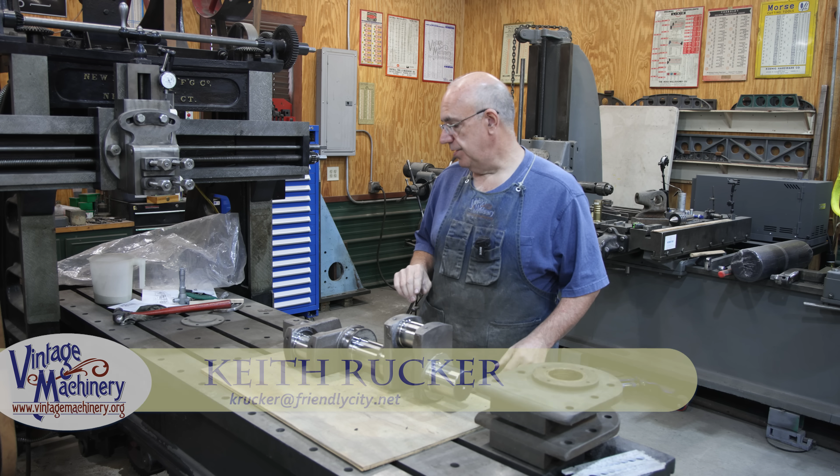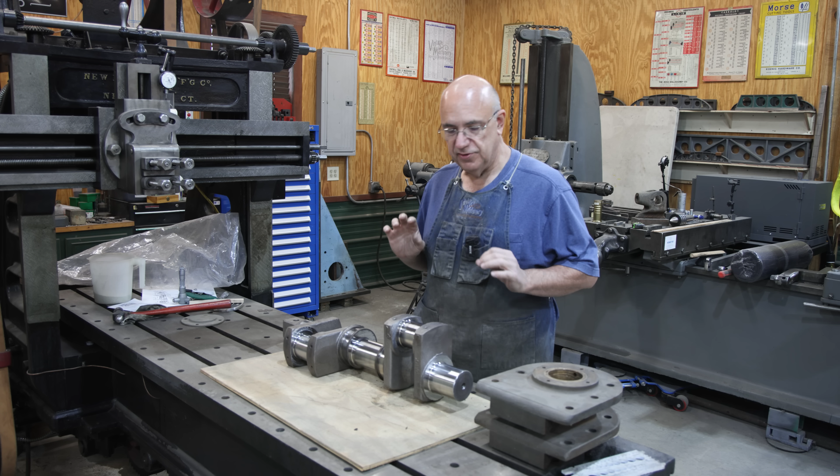Guys, today back to working over on the steam Stoker engine, and today's goal is to do some inspecting work, figuring out and coming up with a game plan going forward. I also need to get a bunch of parts and hardware ordered because I know I don't have a lot of the stuff I need. I need to get a list of what I need to order. So we're going to be doing some of the things that just have to be done in order to move forward on this project.

We've got the slideways for the crosshead machined and they're ready to go. Before I can really continue on, I've got to start looking at putting this thing back together, and there are some things I just haven't taken the time to look at. Part of it has to do with the crankshaft and these bearings right here. Now I have mentioned before that this crankshaft was honestly one of the things that kind of slowed me down on this project. When I got the Stoker engine taken apart originally, the crankshaft had some issues with these bearing journals in here.

We decided we were going to get this whole crankshaft reworked. I took it to a shop not far from me that specializes in doing crankshafts. That's really their expertise, mostly in the diesel engine world - big semi-trucks, big tractors, things like that. But it's a crankshaft, and when I took it in there he said, yeah, I can do it, doesn't matter if it's a steam engine or a diesel engine, it's a crankshaft. I had the original specs for this, I had the blueprints for it, and he was able to take that and basically take this thing back to where it needs to be.

What he had to do was build up all the journals in here, all the bearing journals, and then grind them back down to the proper size. He has a machine shop set up for that. I wish I could have gotten some video of him doing this, but he wasn't doing it the day I was over there. He's got a system where when he welds this thing up, it's a special machine - basically a MIG wire feed welder that welds it, kind of like when I'm building up journals to do cane mills, but it's all done underwater. He's got it all submerged down into a tank, which keeps the crankshaft cool and keeps it from any distortion.

All right, so here is the crankshaft. You've got the main journals, this one and this one, on the center of the crankshaft, and there's the two bronze end caps. There's also one in the center that this whole thing pivots on. You've got these journals out here, these are for the connecting rods, and they're offset at 90 degrees. And then you've also got these two right here, these are where the eccentrics go. They're kind of like cam lobes, and that's what's going to move the valve back and forth to let the steam into the right place inside the engine.

So we've got basically 3 different measurements that we need to make. Let me try to remember. The main journals, according to the blueprint, are supposed to be 3 inches. Let's see what we got here. I'm going to measure this with my micrometer. And yeah, we're right on the money. So these are all right on 3 inches.

These up here, I don't remember what these are. So 2 3/4 — 2 3/4, right on the money. And then I think these are actually larger, I need to go up a size of micrometer here. Yep, these are 4 inches right here, and they are right on the money. So I know where we need to go. Again, he did an outstanding job grinding this, these are dead nuts on right where they need to be. So we should be good to go there.

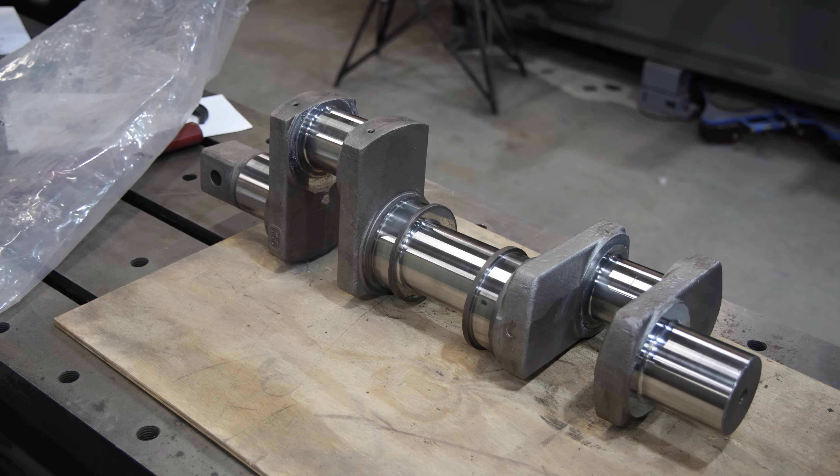All right, these pieces here basically bolt onto the side case of the main casting, and your main journals have one bearing on this side, one on this side, and a third bearing in the middle that's just a split. These right here are solid, not split, but I need to check these out, check the diameters and see where we are. Now one of them just has an end cap that goes on it, in fact this is the end cap right here, that'll seal it up, keep any oil from coming off of it. The other one actually has the shaft that comes through it, and there's a square kind of power takeoff on that they actually power it with.

This one has a grease seal or oil seal that presses in. I've already pressed that out, and I've been able to find this is a Garlock brand. I found the numbers on it and was able to order an exact copy. That is on its way to me, but there is a seal that presses in there, that's why that little indentation's in there.

So these should be, well for what we're going for, they need to be 3 inches, or actually just a little bit oversized, because the journals are a true 3 inches, and for clearance you need some oil clearance in there. They say for every inch you need between 3/4 and 1/1000 of an inch, so that's going to be about 2 1/4 to 3/1000 oversized, which is ideally where we're going. I don't know where these are, I have not measured them. I have a bore micrometer here, a tri-mic they call these, 3 points, you get a really good accurate measurement with it, and I'm just going to see where we are.

So when I took this engine apart, I kind of bagged up a lot of the parts and put them over here where I would have things together, and I tried to even mark on here where they came off of. A lot of this is hardware, and on this Stoker engine, they didn't really use bolts to put it together like you would think. Almost everywhere where there would be a bolt to hold something together, for example these little side plates over here that bolt onto the side,

instead of having a bolt that goes in there, they have a stud that comes out of the casting and then a nut that tightens up on it. That's pretty much how they did it all. Not exactly sure why, there's a reason for that, but that's what we're going to go back with. A lot of these places you probably could use bolts, but hey, we're going to keep it original, so we're going to put studs back in here.

Now I have here a parts list and a parts diagram that shows all the parts, and there's some information about the studs in here. Let me just zoom you in here and show you this drawing. This is pretty cool, so this is a nice drawing that shows a side view and top view and everything else, and it has a list over here of all the parts that go in here and where they go.

This diagram is going to be real helpful to me as I start putting this thing back together, I'm sure. Although I think I remember where most everything went, I may have a question or two, and I can take a look at this, and it will really help out in putting it back together. I also have some other documentation, drawings, and so forth. Fortunately, I got a lot of really good information on this engine that's going to really help out putting it back together.

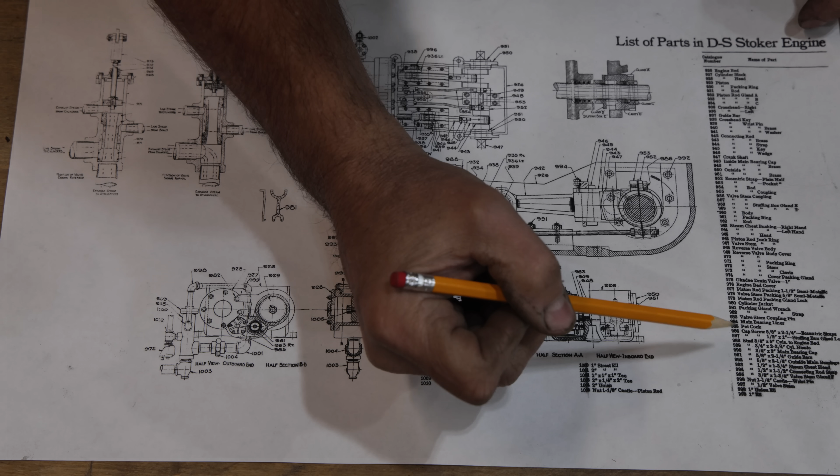But down here, you got all the different studs, and you can see, like right here, you got a stud that's holding that plate on here. You got studs holding on the side plates here. There's studs holding everything together in here. So anyway, I got to get all this stuff ordered. I got the original stuff that came out of here, but this stuff is toast. It was really badly pitted, so we're just going to replace it all and put fresh hardware in here.

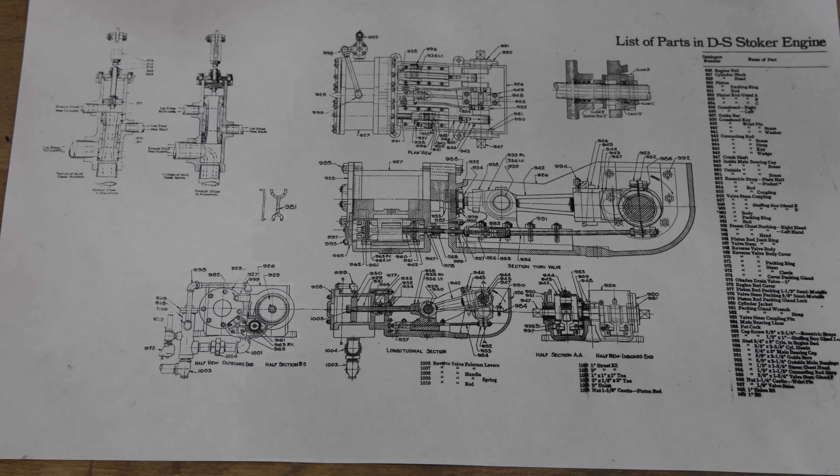I'm just going to grab my first bag here and dump this out.

And these are the studs that actually hold those side plates on with the bearings that we were just looking at a minute ago. And I got nuts.

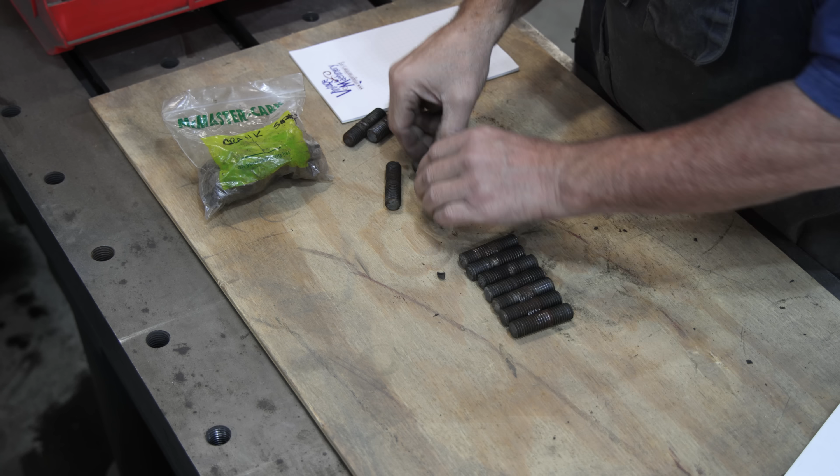All right, so there's the nuts. Let's figure out what size these are. So these are 5/8 inch diameter, and they look to be 2 1/4 inches long. I'm gonna look over here on my parts list. Yep, 5/8 by 2 1/4. I found that here on my parts list. I'm just gonna kind of put a check mark there.

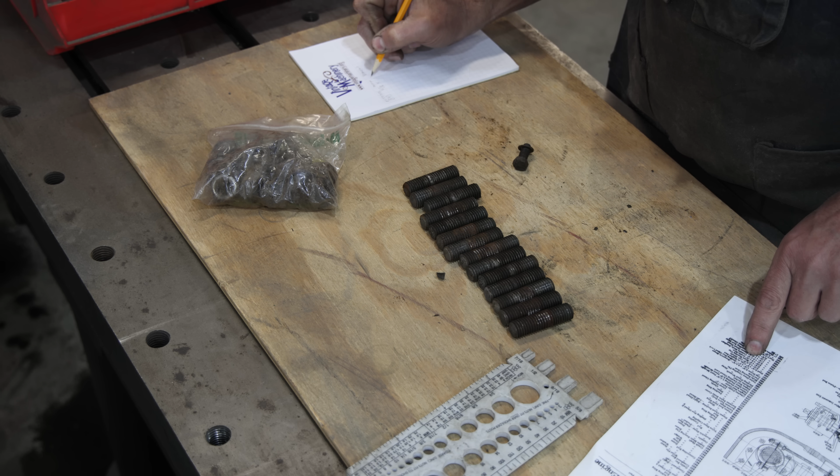We got 14 of these. I'm gonna write these down and go verify these numbers looking at the holes in the machine. This is the outside main bearing. I need 14, and we need 5/8 by 2 1/4 stud, and we'll need nuts for those too.

Now there's also, this is one place they did use a bolt, and this is the little cap that goes for that little cap we talked about on the end. These are 3/8 by 1 inch. There's 4 of those. I'm just gonna put bolt there.

Okay, let me put these up. We'll grab the next ones and see. These are not in great shape, a lot of the hardware itself is really severely pitted, and this actually isn't that bad, but I wouldn't want to reuse these nuts for sure. We're just gonna put all new studs. A lot of these studs I actually broke getting them out, or they just really fought me the whole way. We're putting all new hardware in here. This whole thing was, anything that was cast iron held up pretty good. Anything that was steel was severely pitted and rusted beyond what I'm comfortable trying to reuse.

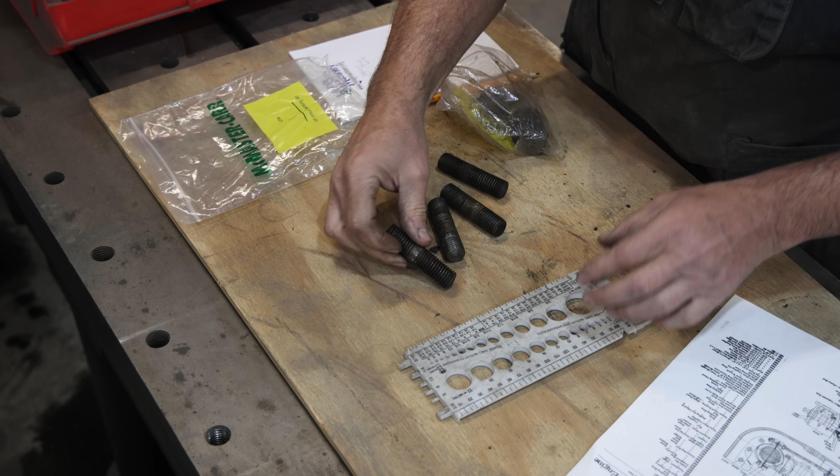All right, what do we got here? These are for the main bearing on the inside, and there's 4 of these, and these are 3/4 by 3. Three-quarter by 3 stud and nuts. Okay, next, all right, these are the cylinder studs.

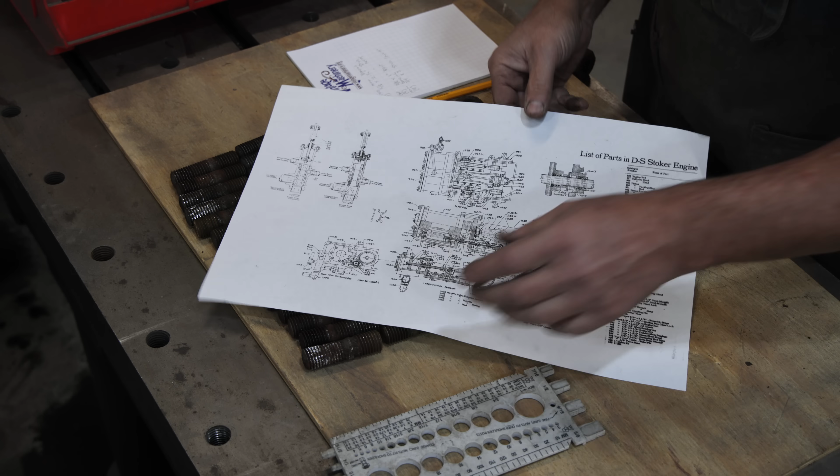So all around, the whole cylinder on this thing is kind of bolted onto the main case. And see, we got multiple things going on in this bag. Let me kind of get these sorted out. All right, so the cylinder studs, I will note that on my drawing, you got a short stud on this side and a long stud on this side. Now, this model is a little bit different than the one I've got. There's a bigger separation in the center section on the one I have, and it basically doesn't have a stud that goes all the way through. It's a short stud on both sides.

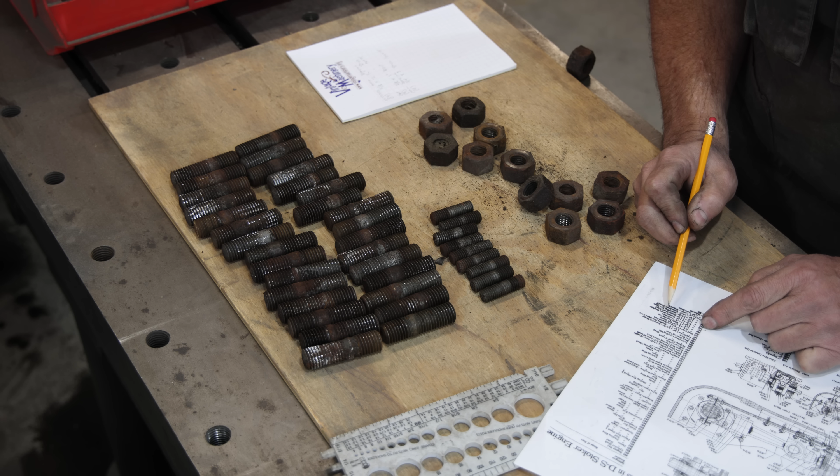So in this, let's see what we got, what it says we need. Let me find them on here. All right, so I got 3/4 by 5 and 3/4 by 2 3/4. So let's see what these are. These are 3/4 and 2 3/4. So we don't have the 5-inch ones, we just got the 2 3/4.

And let's see, these are, what are these called? The cylinder to engine bed. And these are 3/4 by 2 3/4. There's 31 of them. Interesting. I'm going to put that on here. I'm going to confirm all these numbers. I don't have a list over here that shows the numbers of them, how many.

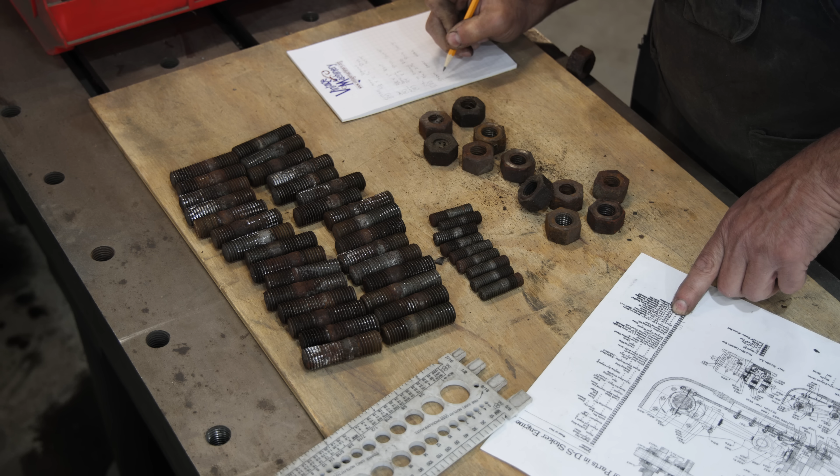Now there's also these. These are 1/2 inch by 1.75 inches. Okay, this is for the steam chest heads, and that's why they're in that same bag. So, 1/2 inch by 1 3/4, and there's 9 of them.

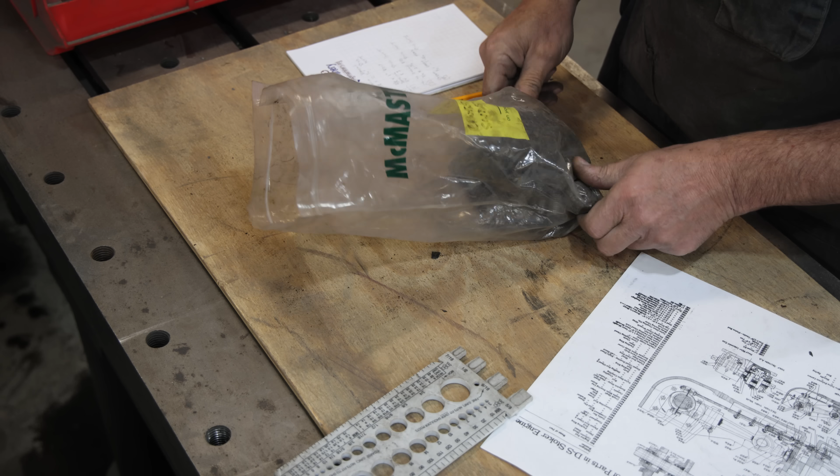All right, these are the crosshead studs. So that area that we just worked on inside the engine that we planed, these are the studs that hold the little cover on those. These were really in bad shape. Look at that nut there, how corroded and pitted. I mean, it's halfway gone. So let's find these on the list.

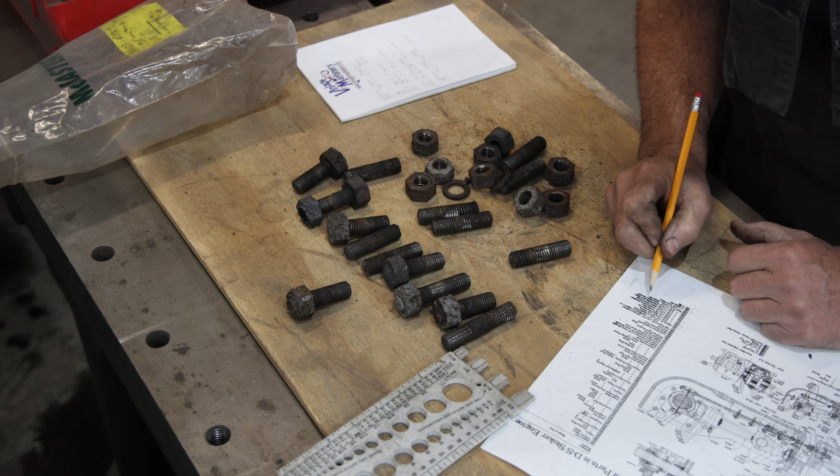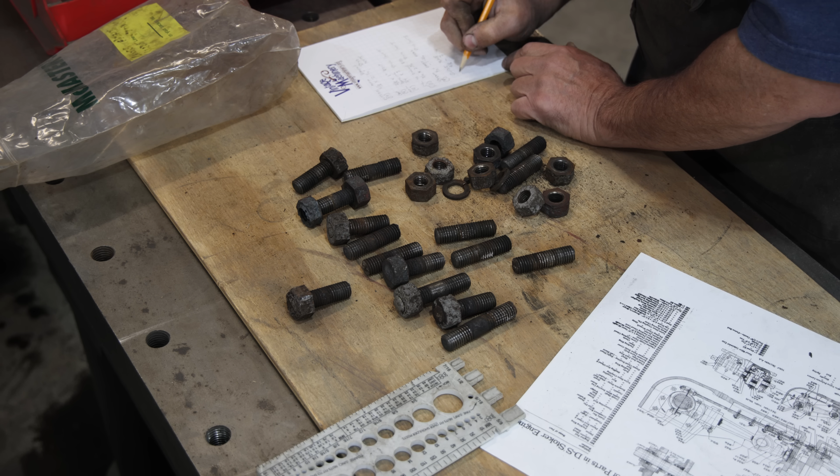I think these are what they call the guide bars, which they say is 5/8 by 2 1/4. Let's see if that's right. 5/8 by 2 1/4. Yep, call these guide bars. We got 16 of them. I'm going to confirm again all my numbers.

Okay, these are the top cover studs. There's a cover that goes on the top that holds them down. These are 1/2 inch by 1.5 inches. Let's see. Cover.

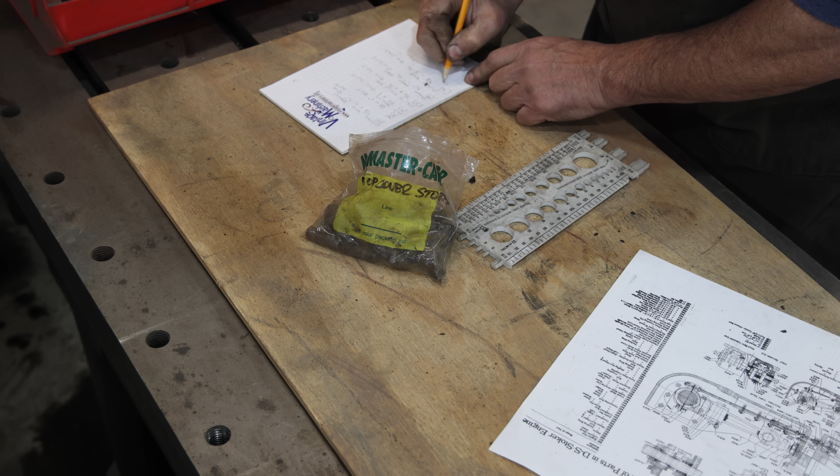All right, we are getting our list of stuff put together here. I think I've got my hardware pretty well covered between measuring what's over here and going down the list and seeing what all I need.

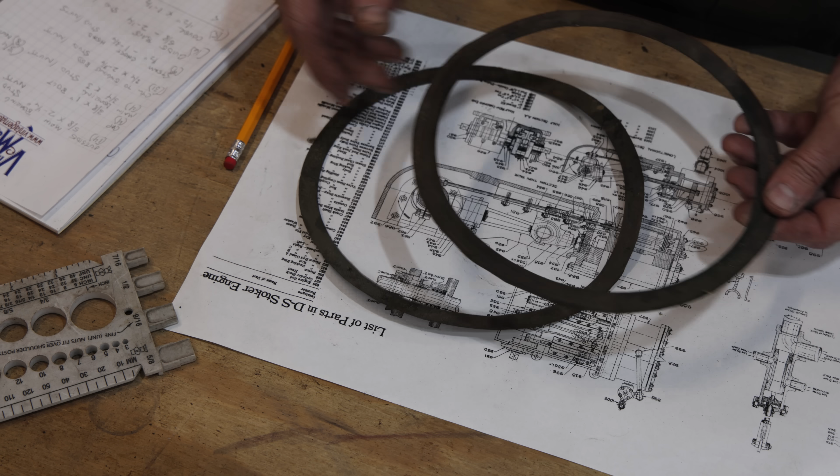The next thing I need are some copper gaskets. These actually go between the main cylinder casting, cylinder block, and the cylinder head. There's 4 of these, 2 for each cylinder, one for the front and one for the back.

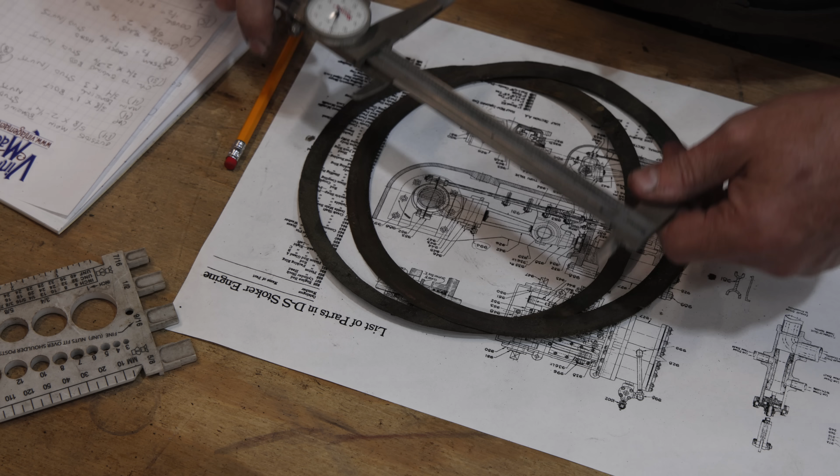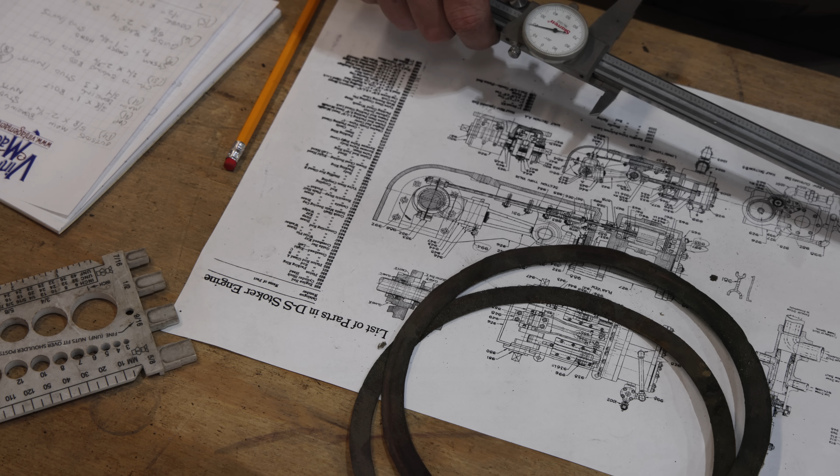I've got them measured out already on what I need. Let me see if I got that sketch. So these are, it's like 8 1/4 on the outside diameter. The inside diameter, 7.1. I actually measured, I think 175 is what I need, 7.175 inside diameter. I measured the part that they fit up over, and the thickness of these is about 25 thousandths.

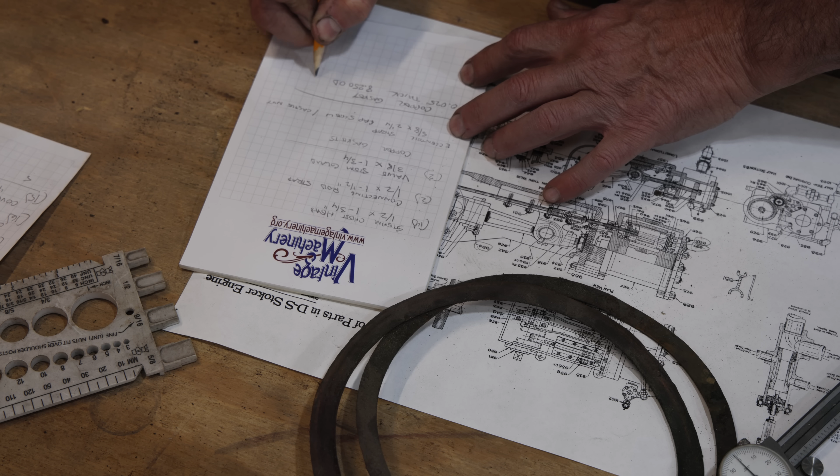So let me write this down. 25 thou thick, 8.250 OD, and 7.175 ID. I'm gonna have to probably order these, get somebody to cut them out for me. My laser won't cut through this metal, so I'll have to get them done somewhere professionally, but I'll find some place to get those ordered.

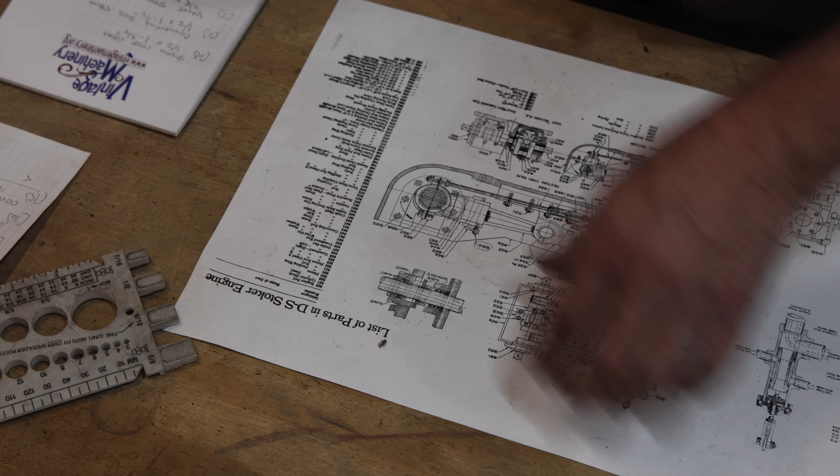And while I'm measuring gaskets, the other thing I need is some gasket paper to make some paper gaskets. There's a couple places that need these. I kind of saved some of the old ones, what was left of them. The main thing was just to get the thickness of the gasket paper.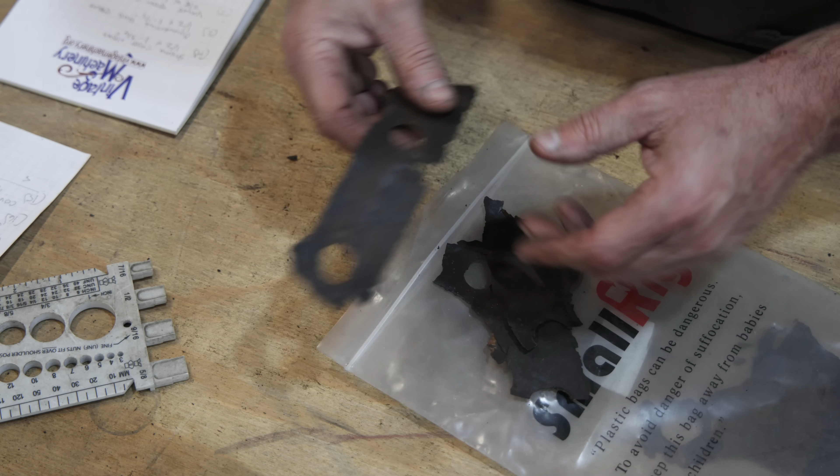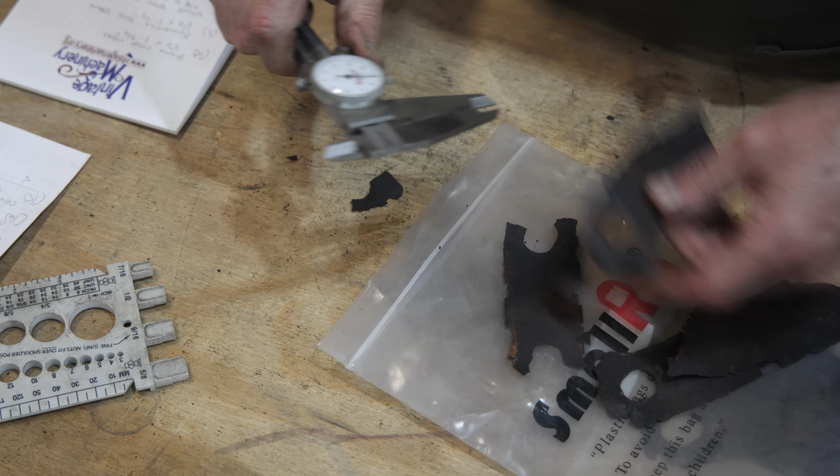So let's see what this is. So that's about 9 thousandths, 10, 12 thousandths. I'm sure this paper's been compressed. 11, 12 thousandths. So probably, well, a 64th is basically 15 thousandths. So I will probably go with a 64th inch thick gasket material.

We'll order some gasket paper, and I can cut these out on my laser. I've got my little laser, it'll do gaskets, and I'll have to draw those up and get those. So let me write this down. Gasket paper, about what did I say, 64th? Yeah, 1/64 thick.

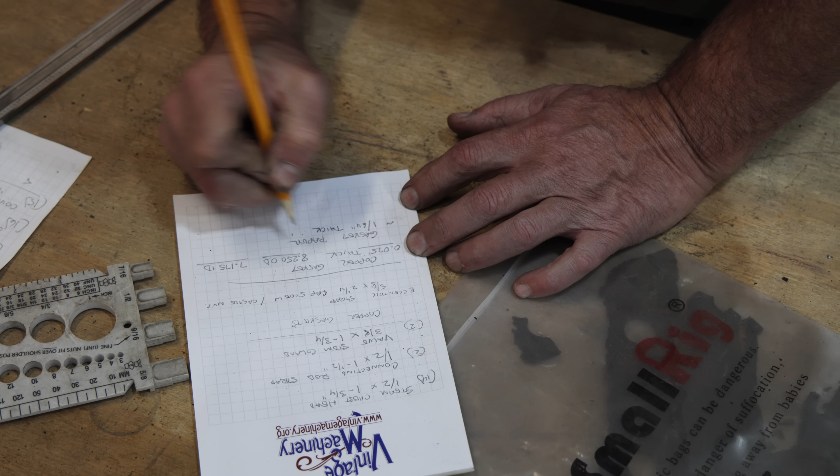All right. Well, I'm sure as we start to put this thing back together, there's going to be other little pieces of hardware that we need, but I think we've got the major part here. I'm going to just go down through my list here and see if there's anything else that stands out. And I've got a list of stuff to order.

Yeah, I actually went just a minute ago and kind of got a rough idea. It's going to be about a $500 order, not counting the gaskets, the copper gaskets. I think those are probably going to be another $250, $300, I'm guessing, to get those cut out. But anyway, we got to have this stuff, so I'm going to go ahead and get this stuff ordered. And when we get it in, I think we can really kind of start on the next steps on this project.

And I got to decide what the next step I want to do is. I think that what I'm going to probably go ahead and do is get the babbitt poured in the crosshead slides, because that's going to require heating that casting up, and I would rather go ahead and get that done before I start putting things back together. Putting heat in there after we start putting things together could potentially cause some issues, so I think I'd rather just go ahead and get that done.

To do that, I got to put the cylinder heads back on. I'm going to have to make some little jigs, fixture, whatever you want to call it, to hold the piston in, or to hold everything in the right position, so that we can pour those. You'll see when we get there, but I think that's going to be the first step. I got to at least get the cylinder head on to do that, so I'm going to need this hardware to do that.